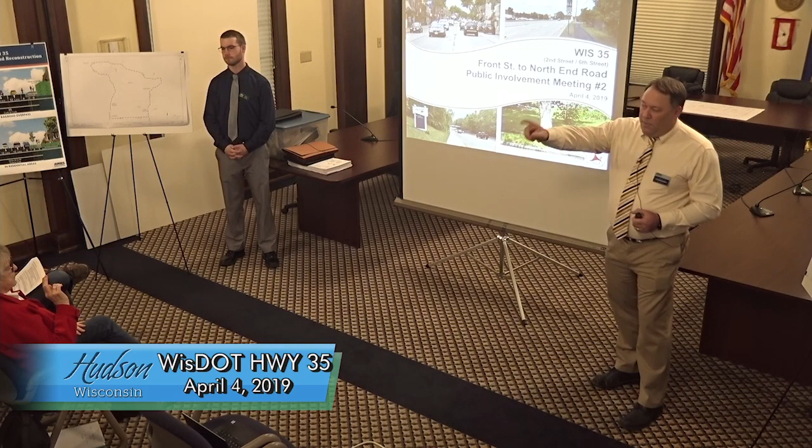So again, thank you. Please, if you have not signed in, sign in on the sign-in form in the back. That makes sure we get you on our mailing list if you didn't get a specific letter invite. We sent letters to people who own frontage or property along the roadway, or who came to the last public meeting. That's how we got you on the list. But please take a minute at the end to sign the sign-in form, and there's comment sheets back there. Feel free to take a comment sheet, sign it and put it in the comment basket on the table, or take it home and get it to us.

I think there's a date, we try to do it in the next month. I know some people are confused about when things started, but there are people who think the meeting presentation is going to start at 5:30.

Well, trying to accommodate. People back here complaining they're not starting until 5, and now we're complaining it's not starting until 5:30. I'm not complaining, I'm just pointing out. Right, what's on the web. Well, just saying something that might. Yeah, I know.

Well, I apologize for the confusion. I should have bolded that or made it a little more clear in the letter. I'll get started, I'll keep going regardless, and if some people come in, I'll make sure I talk to them one-on-one afterwards. Again, I do want to thank you for taking the time to come and talk about this project.

It's a pretty big project for the city and for the state. We've got a little presentation we're going to go through, and then exhibits around the room you're free to come up to. We're here till 9 o'clock tonight. We're doing this presentation twice, so there's a meeting from 5 to 7, and then one from 7 to 9. The 5 to 7 was meant for people who lived in Hudson, and the North Hudson people to the next one, but it doesn't matter.

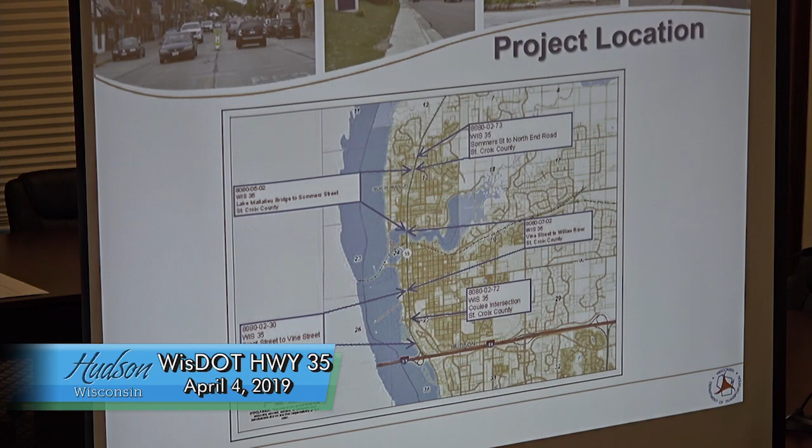Within that project, there's going to be an improvement project at the Coulee/Buckeye intersection. That's a different one of these IDs, the second one. Then we've got the next map, which is Vine up to the bridge.

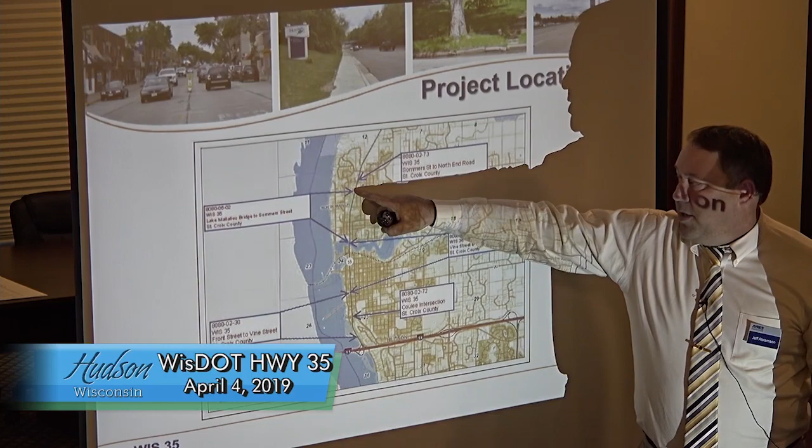That's one project, and the bridge up to Sommers is the last project. If you were here at the first meeting, what's happened since then is we've added this. Before, this project was going to end at Sommers, but now it's actually going up to North End Road, about 850 feet. There's some work being done on that stretch, and some safety improvement dollars got allocated for that, so it's its own project.

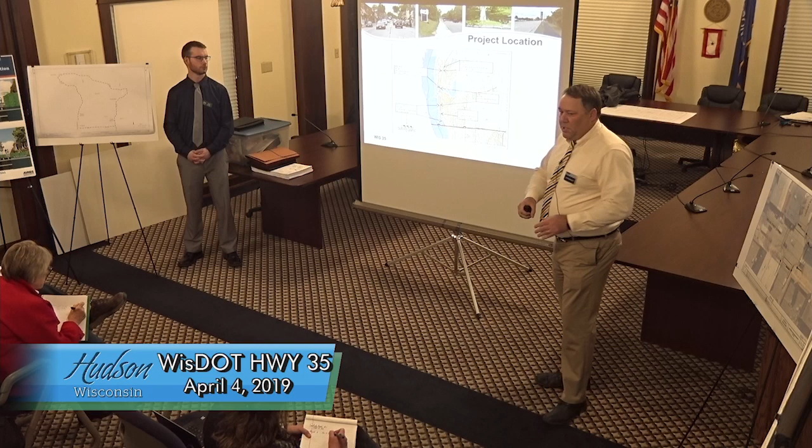So there's a lot of numbers and a lot of titles and names. There's really 5 projects, but it's broken into 3 main projects and then 2 little safety projects scattered in there.

So, need for the project. Obviously the pavement's in rough condition out here. We've got issues with stormwater, aged utilities, basically stormwater and sanitary. Safety, curb ramps - we're trying to upgrade curb ramps to meet ADA standards.

As I mentioned, the Coulee and Buckeye intersections had some crash history, some safety issues we're trying to address there. Substandard vertical clearance at the railroad - we gotta get to 14.5 feet, which is what we want. Right now it's 13.10 roughly.

So we gotta lower it a little bit under there for minimum standards. And then up between Sommers and North End, there's been a lot of rear-ends. There's a lot of people turning into the gas station, the restaurants, those type of things. So there's work that's going to be done there, and I'll explain that when we get into the specifics on the project.

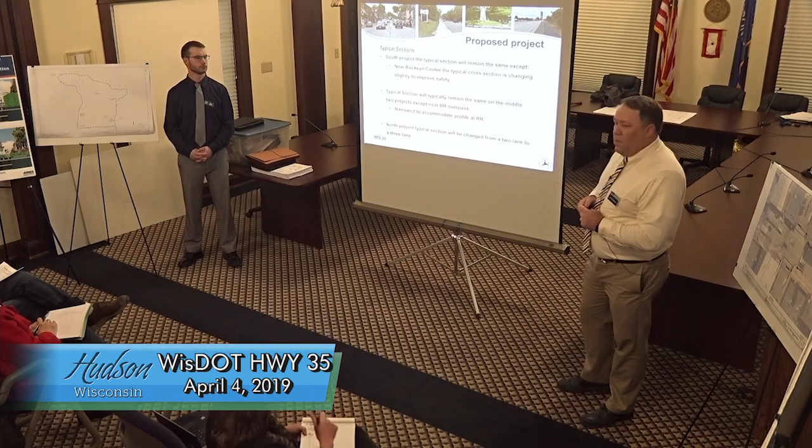So the proposed project, what we're really proposing out here, the South project. Are you guys going to be taking out some trees along the pavement area? Yes, a lot of trees. At the last PIM, we mentioned that too.

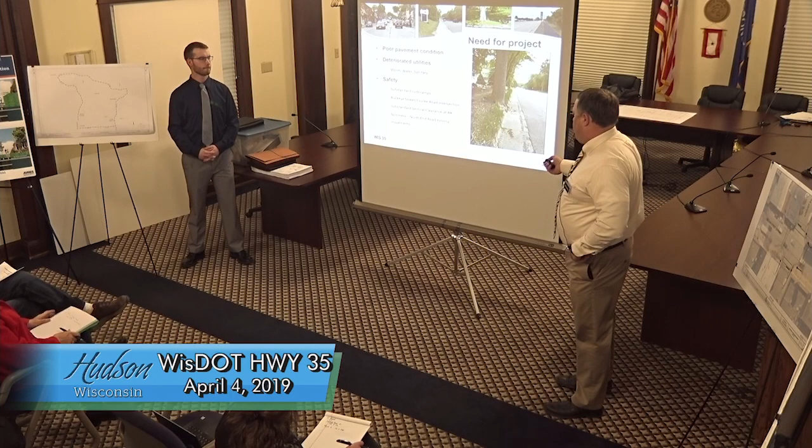You can see this tree is actually grown over the curb and gutter. A lot of it's humping up the sidewalk behind it too. Maybe I'll get into that as I go through what's happening on each project.

I'm going to start on the South project, the typical section on the South project. The typical section means kind of what the road looks like. So this South project, we are not planning on replacing the curb and gutter or the sidewalk that's out there.

South project, from the beginning of the project at Front Street up to the Coulee intersection, is a joint repair. That's concrete pavement right now, so we're going to go in and fix the bad joints. Then there's some safety work at Coulee - I'll touch on that in the next slide.

And then from Coulee to Vine through the downtown, that's a coarse mill is what we call it. We're going to mill and then overlay, so that'll get a new driving surface, but it's not going to get all tore up. The sidewalk and curb and gutter are going to remain.

So that first project, sidewalk and curb and gutter are in place, except for curb ramps, where we're going to improve them to meet current standards. Question: I thought you said you weren't going to do the curb, and now you just said you are. No, did I say it wrong? You had originally said Vine to Coulee, and you meant Front Street to Coulee. I apologize.

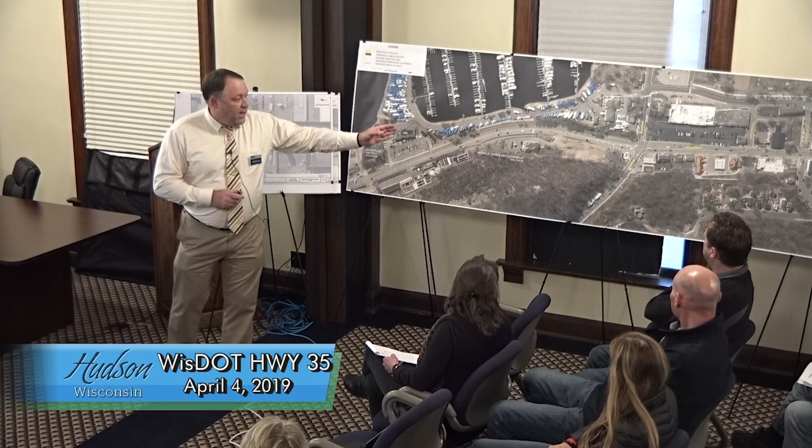Front, there's a lot of names here. Front to Coulee, curb and gutter, sidewalk is in place, joint repair - that's it. Coulee, Buckeye to Vine, sidewalk and curb and gutter is in place - that's a mill and overlay.

Everywhere there's a curb ramp, we're going to improve it to current curb ramp standards. So that does require some sidewalk and a little curb and gutter at each of those locations. That's kind of the exception.

When you say improve, what do you mean by it? Because there are already some ramping there. Yeah, but to be ADA accessible, there's certain grades - it can't be more than roughly 8%. And you gotta have these truncated domes, the bright yellow ones you can feel.

I don't know what you call them - I guess a truncated dome warning field is what we call them on curb ramps. So those are getting put in, and then there's certain widths and slopes that curb ramps need to be to make it handicap accessible, I guess is what it comes down to.

Did you want questions during, or do you want to wait? Yeah, it doesn't matter, I want to keep this pretty informal. I thought I saw in previous plans, plans for improved parking for pedestrian safety, that we'd have bump outs at the intersections downtown. You caught me - I was going to get to that, yes, you're right.

That is one of the things I was going to bring up that's different from the last time we met. That's what these displays here are. At a few of the intersections, we are putting what we call bump outs in the downtown. That's something new that the city of Hudson decided to do.

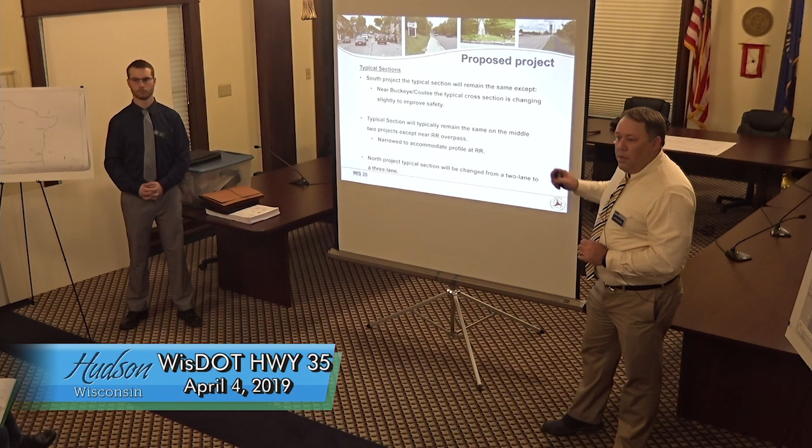South project typical section remaining the same. You're doing an overlay also, aren't you? No, joint repair from Front Street to Coulee. Those are concrete joints—they get cut out and patched and fixed. So no overlay there. The overlay is from Coulee, the Dairy Queen, up to Vine.

The next two projects, basically from Vine to the bridge, that's still within Hudson, and then the bridge up to the Sommers, which is in North Hudson. Those two projects are classified as reconstruct projects—they're getting a whole new pavement structure. So those are getting torn up, with new curb and gutter along the whole length of those projects.

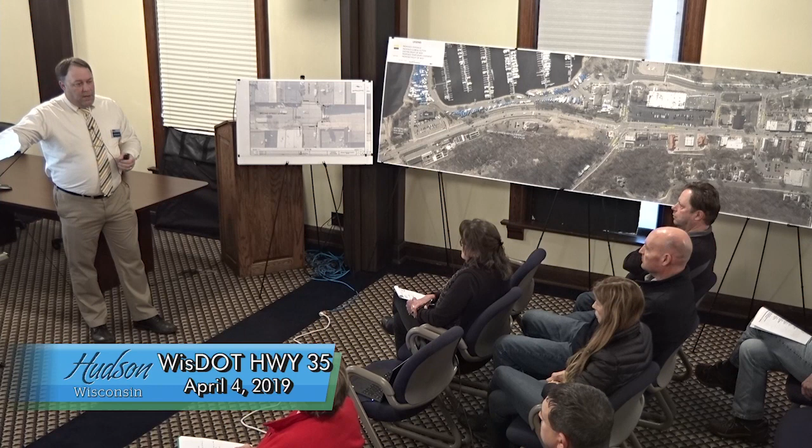Sidewalk's going to remain, except for curb ramps that we're going to upgrade. There's also some driveways we're trying to improve the grade on—some driveways are kind of steep, you bottom out. So we'll be replacing some panels at curb ramps and some sidewalk. There's also utility work going on out here, water and sanitary work, that's going to require laterals to people's homes. Those laterals will go up to the right-of-way line, but that requires a panel or two of sidewalk to be replaced.

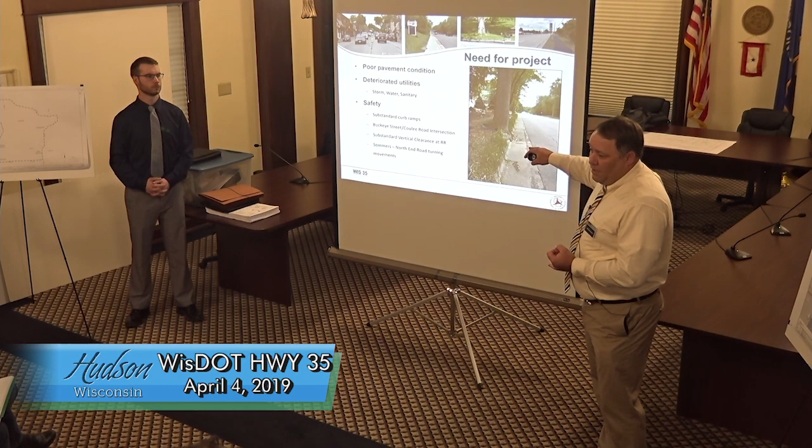From that stretch from Vine Street to Malibu, are you taking out all the trees, or just selectively taking a couple out? No, it's the majority. The problem is we need a couple feet behind the curb in order to pour new curb and gutter with the machine that pours it. They're beautiful, old trees, but in order to fix the curb and the utilities, a lot of those are coming out.

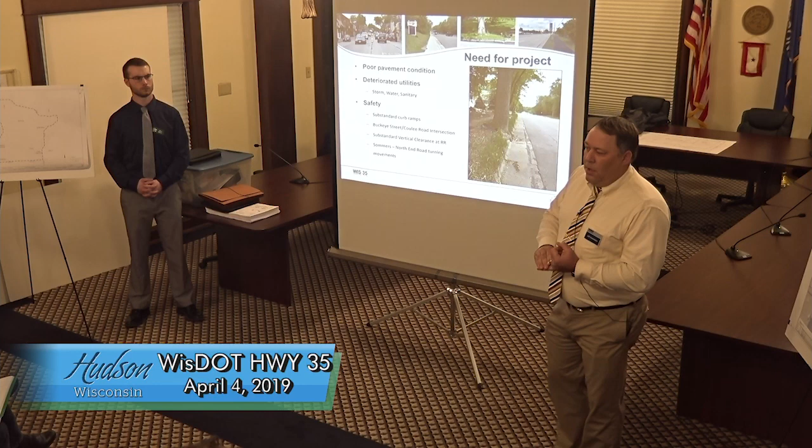We are planning on—correct me if I'm wrong—replacing or putting some new trees in at the end. I don't know the extent of that yet, we haven't gotten that far, but there were some plantings that were going to happen as part of this.

So the typical section, meaning the roadway width on those northerly reconstruct projects—we are going to tear up the pavement and put new base down and new pavement. The plan is that will be a concrete pavement. Right now it's asphalt with some underlying concrete in areas, so that will be a change. But the pavement design shows that with the traffic volumes out here, concrete is the most feasible.

Are you going to deal with all the sidewalks that don't line up and ramps, or pedestrian paths that don't go anyplace? No. The sidewalks, in general, are going to remain in place except for curb ramps and where we need it for utilities and driveways.

The city of Hudson has asked us, when we bid this project out, to bid it as an alternate bid, as they call it. Our plans will show just removing those pieces of sidewalk that have to be replaced, and it ends up being almost half the sidewalk, when you start looking at curb ramps, all the stuff for water and sanitary, some driveways, and stuff that's busted because of trees.

Well, if I understand this, you're saying from Vine Street to the bridge, you will have on-street parallel parking? No. You mentioned parallel parking. Yep. So from Vine Street, currently, today, from Vine Street to the bridge, parallel parking, it's 40 feet wide, which accommodates parallel parking. What we're proposing is to change it. It'll go from Vine to River, which is two blocks short of the bridge, it will be the same as it is today. And then from River to the bridge, we're going to pull it in two feet on each side, which then eliminates parallel parking, but allows us to have bicyclists on-street to get across the bridge.

I've got a slide on bike and pedestrian coming up, I can talk about that a little more. And we really need that. What the driving factor is, we're lowering underneath that railroad overpass, lowering the road about a foot at worst case, zero inches down to a foot. And to lower that, if we move it in two feet on each side and lower it, we can get rid of that vertical between the back of curb and the sidewalk, because right now the sidewalk is butted up tight to the back of curb. If we pull it away two feet, then we'll have room to put a slope in there.

So the sidewalks will remain, those retaining walls will remain, and one of the big reasons is the bike accommodations. There's on-street bike that's going to be in the middle, going through downtown with parking, you can't have bikes, there's no room for bike accommodations. So the plan is to take bikes down Buckeye, have on-street bike accommodations on Buckeye, and then all the way past the park or all the way on First Street. And then River is the last one that comes back out. So bicyclists will be accommodated on street from Buckeye all the way up to River. And when they come back onto 35 at River, the typical section of 35 will handle bike accommodations all the way to the north. It's either to accommodate bikes through your downtown, you either got to give up your parking on one side, because there's not enough width there with everything that's there. There's not enough width to have parallel parking and bike, safely have bike accommodations. So that's a driving factor.

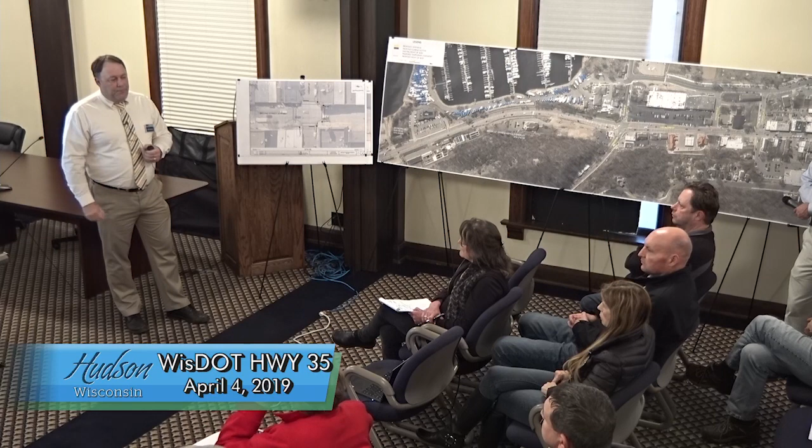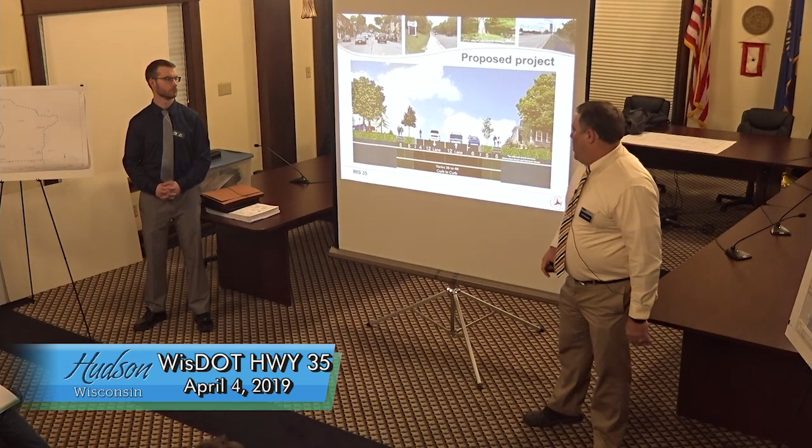So that's a change from what you see today. These are just depictions, and we can look at these one-on-one, but typically we've either got a 36 or a 40 foot. In the 40-foot version, you've got 6 foot of extra width plus your 2-foot gutter.

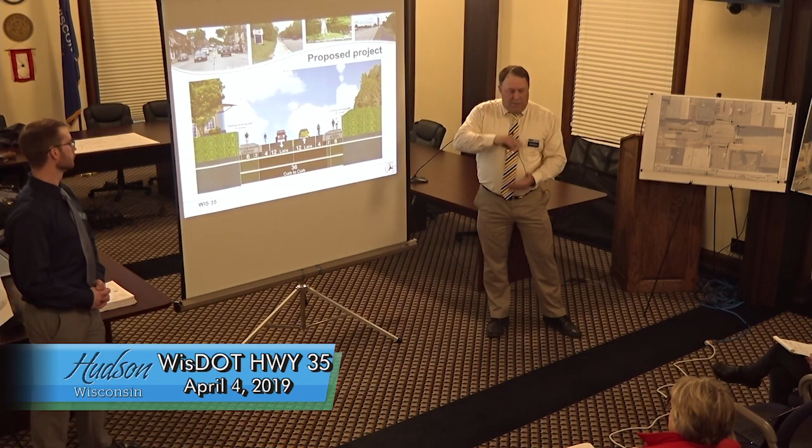It gives you an 8 foot for parking, and then your existing sidewalks. When it's 36, when we go underneath the railroad overpass, picture the railroad overpass up above here, it'll be a 12-foot lane, a 4-foot that will accommodate bikes, your curb and gutter, and then a slope up to the existing sidewalk. That's where we can get rid of that vertical change that we have to do to get our clearance under the railroad.

Again, this is just a summary of what I kind of jumped ahead to because we're kind of all over the place, but the summary of what's happening on the rehabilitation: joint repair for the south half of the first project, and then a mill and overlay, doing safety improvements at Buckeye, and doing curb ramps.

On the south project, can you explain what you're talking about in terms of safety improvements at Buckeye? Yep, I will. How about another slide or two? I've got a slide specifically for that.

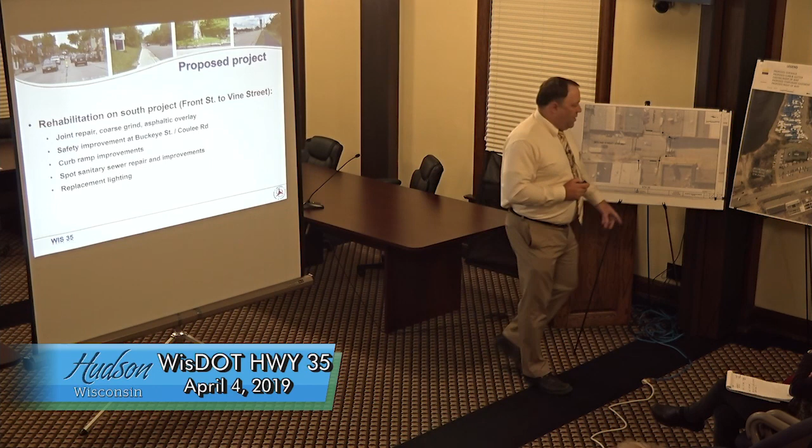One thing I probably haven't mentioned yet, on the south project down by your wastewater treatment plant, the city is going to be doing some repair or replacement of some sanitary main trunk line down there. So there is a portion, I believe it's in the northbound lanes. This is actually 4 lanes down here, but the rightmost lane is going to be a trench, replacing some new sanitary lines down there.

And then, like I mentioned, water and sanitary work north of Vine the whole way. But down on this end, there will be some sanitary work. That'll require us to flop some traffic back and forth for staging, and I'll get into the staging here in a second.

I realize it's probably hard to see, but really what's happening at Coulee and Buckeye, there's some safety concerns here. There's a northbound right turn lane in front of the Dairy Queen. That right turn lane is going to get extended back, so we're going to add some storage and length to that right turn lane. And right now at that intersection...

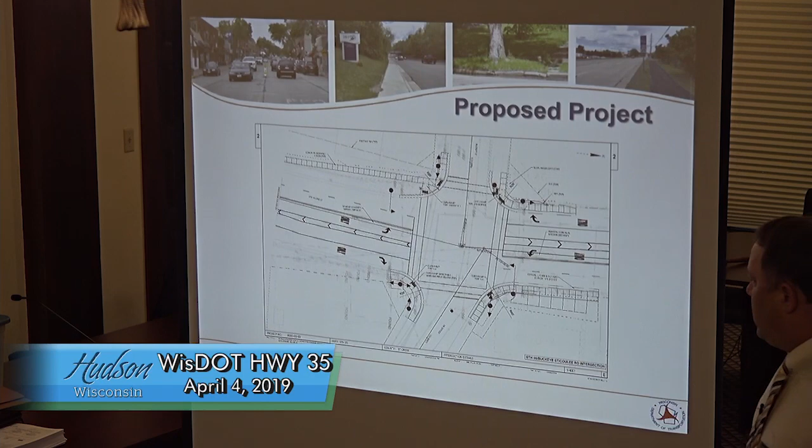It's hard to see here, but there's some existing channelizing islands out in the middle of this. Those 2 islands are getting removed, and what that does, it allows us to line up the southbound left turn and northbound left turn more straight across from each other. Right now they're offset because of those islands. So when we remove those islands, we can line them up, and it's a lot safer when you're making a left and the other person making a left is straight in front of you. If you're offset, it's a bigger safety concern. So that's the main safety improvement there, realigning those left turns so they're opposing.

And then, like I said, adding some length to that right turn lane. Will there still be just one northbound lane then at the Dairy Queen? Correct. Yep. The lane configuration will be a right turn lane, a through lane, and a left turn lane, same as there is today. It's just by removing those median islands out in the middle there, we can line things up better and make it a safer functioning intersection.

Is there any thought of putting some signage further down the road towards the sewage plant that identifies left, center, and right turns? Because what happens is people coming down that left-hand lane where it's 2 lanes, they're barreling down there, there's a backup of cars to go straight ahead, and all of a sudden they find themselves in a left-hand turn lane, and then they're all cutting in. Honestly, sometimes I don't think people realize that they're in that left lane and it's going to be a left-hand turn lane.

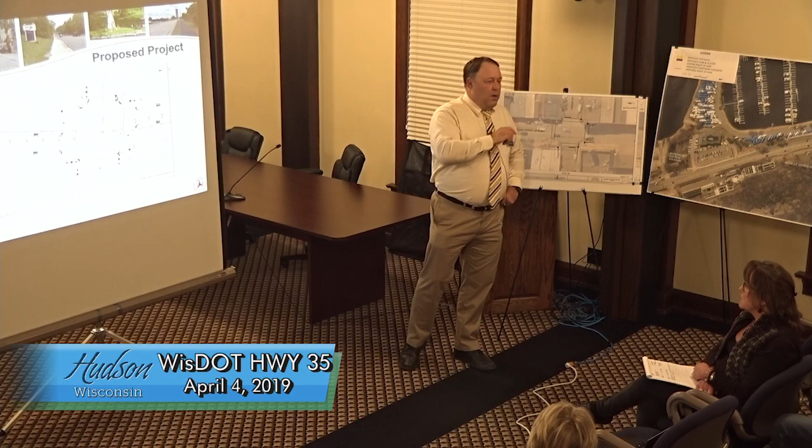I was just going to say you cleared it up, because when you redo that and those streets are lined up together, people are going to know where they can go and go straight ahead. Whereas now, if you're coming new into town, it's very confusing. It's going to make things a lot cleaner when those lefts are lined up and the through lanes are lined up. Everything will be straight.

But I know what you're saying, because you're coming from a 2 lane, and all of a sudden you could get trapped in that middle lane, trapped in a left turn lane. Or they go straight in the right turn lane. Yeah, that too. We got somebody back here that's got the mic.

I don't know if you are also in charge of the signal lights, but there is no left turn arrow as you're heading north. No left turn arrow? No left turn arrow. What they do is one side gets green and straight and left go.

As part of this project, and that's one thing I haven't mentioned yet, we are replacing the traffic signals at Coulee and Monroe. Those two streets are getting new and upgraded signals. We haven't gotten through doing the signal timing and the phasing yet on them. Sometimes what you're saying happens because those offsets are, those lefts are offset. It's hard to get them to go at the same time. When they're lined up, you can get them to go at the same time easier.

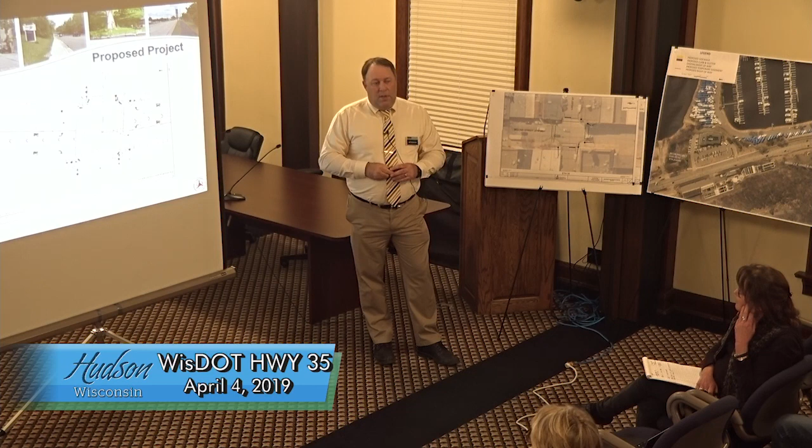So it might fix itself. I don't know what the timing is going to be on those yet, or the configuration, but I'll make a note of that. Yeah, there's no left turn signal, northbound left arrow, when you're going north, down by the Dairy Queen. Okay, somebody up here.

On the map over here, it looked like you're revising the sidewalk on the southwest corner of Buckeye. Right here? Oh, southwest, I'm sorry. That's a really, really, really bad corner for bicycles. It's impossible for bicycles, and that is a bike traffic lane. So two things: one, it kind of looks like you're cutting it a little bit, so it isn't going to be a 90. Right now, you are correct.

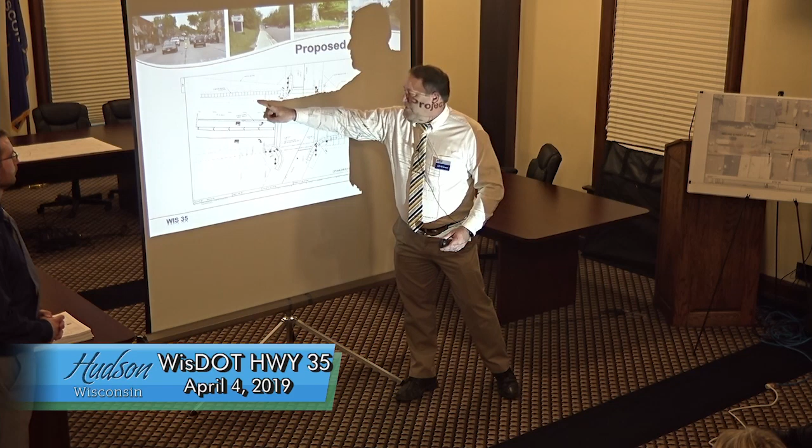I didn't mention that there's about 200 feet from here back where the sidewalk does have a boulevard. Once you get past the marina, there's a green space between the curb and gutter and sidewalk. Once you get up here, that sidewalk dives in and falls right up behind the curb around here. We are going to pull that away for that couple hundred feet to line that up, or to give a boulevard and improve the safety there.

And what's that? Widen? Are you gonna make the sidewalk wider there? Maybe. That's a heavily traveled bicycle path right now. Maybe, yeah.

Wait, if you did that, because it's a dream that the rest of that sidewalk all the way to the bridge gets widened. We're looking at some options with the city to maybe make that a wider 8-foot path. I don't want to commit to that right now because I don't know if it's going to happen yet or not. At a minimum, we're going to pull the sidewalk away so it's not right up tight to the back curb. But there's an option where we may, instead of having that 5-foot sidewalk, make it an 8-foot wide paved path.

Is the signal light construction one of the issues? Yeah, the pole right there, yeah. And that's why we want to get that sidewalk away from that intersection. There's too much stuff in that corner too. But there is an option that we're talking with the city on of making that a wider paved path that could then accommodate bicyclists and peds better.

I'm more or less, I don't really have a question about the project itself. I know you said that on that intersection, at one time you guys had looked at putting a roundabout there, but the cost-wise and the space-wise, it didn't work. And I was talking to a coworker of mine about this. The roundabouts that I've seen, I lived in England for 4 years, so I'm familiar with the roundabouts.

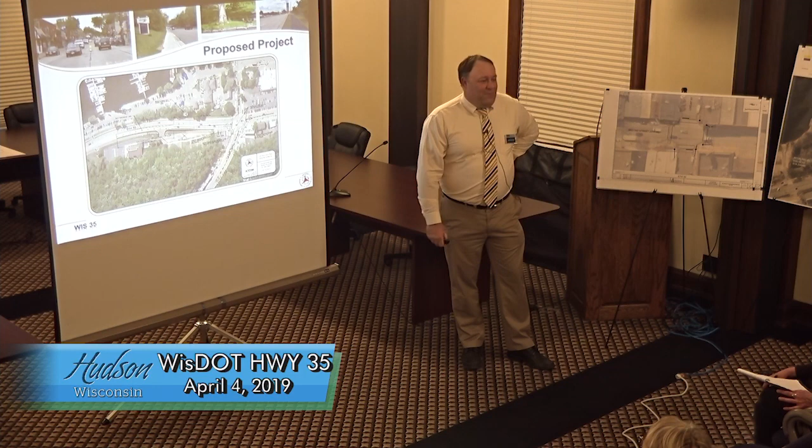I know what you're talking about on that sign, and if you look, there's usually a dot on that sign with the left arrow. It means you're supposed to go around the roundabout. Who's going to look at that sign and know that? Everybody knows you have to turn right, but you've got an arrow going left. It's crazy, two arrows going right would be better. It's an educational process, I know. Probably somebody decided that it's gonna be that way, and anyway, we're not proposing a roundabout here.

Summary of the next projects we talked about: new utilities means storm sewer, water, and sanitary from Vine all the way to the north. That means new curb and gutter, and that means existing sidewalk stays, same scenario, except for curb ramps, some driveways, and except where water and sanitary impact it.

I talked about the change in width from the river up to the bridge, narrowing it up 2 feet. I also talked about tree removal. There's going to be a lot of tree removal required out here. It's required, I mean, we can't do a project like this without it.

I get that, I'm gonna talk loud. But when you remove these trees, can you do something with that wonderful wood besides grinding it up into mulch? Aren't there forestry people or something that can use that wood? I don't know the answer to that. I mean, normally when we have a project, the contractor is responsible to get rid of the wood. I don't know what they necessarily do with it.

I don't know, have you guys ever done anything else at the DOT with it? Up in Ashland, I know we did Ellis, and the contractor sold it to an artist who did chainsaw carvings and that kind of stuff with them. It's probably up to the contractor. I mean, if it's good wood, they're not gonna waste it, obviously. So hopefully, but again, it's not something we usually direct them on what to do with it.

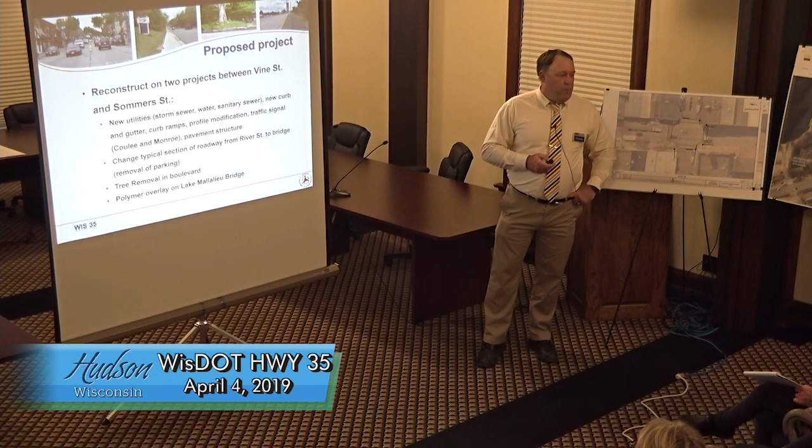We talked about the final project, which is the project from Sommers to North End. The roadway will be widened to the east, going from a 2-lane to a 3-lane. When we do that, we are planning on putting curb and gutter on the right side, or east side. It'll stay a rural section on one side, but it'll have curb and gutter on the right.

Will it have a sidewalk? No sidewalk. Just what we're calling an urban typical section, which is the curb and gutter. That road will be milled and overlaid. The widening will be new construction, but the existing lanes will get milled up, and then we'll pave it all together so we can stripe it and it'll look right, designating which lanes are for what.

Yes? I'll talk loud again.

Is there any chance that funding may change before this all starts, and you might be able to address some sidewalks? Funding is, I would say there's always a chance it could go up, it could go down, it could be eliminated. It's kind of always, you know, funded right now. So once it's funded, it's funded. I don't know if they very rarely make changes to that funding, unless somehow the state of Wisconsin won the Powerball maybe. But I would guess it's probably set where it's at.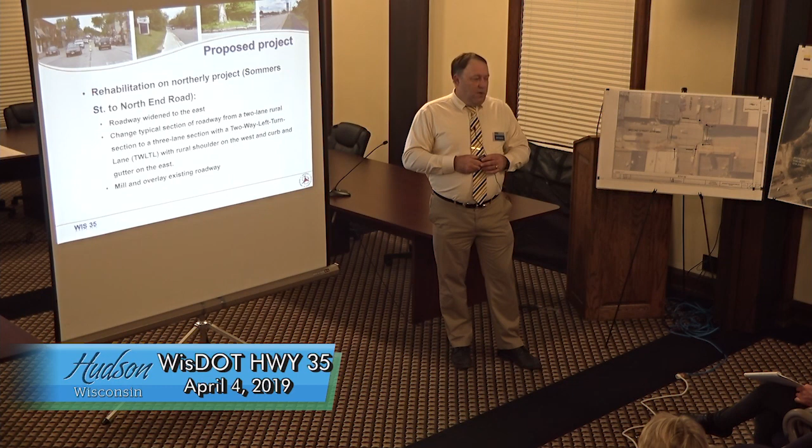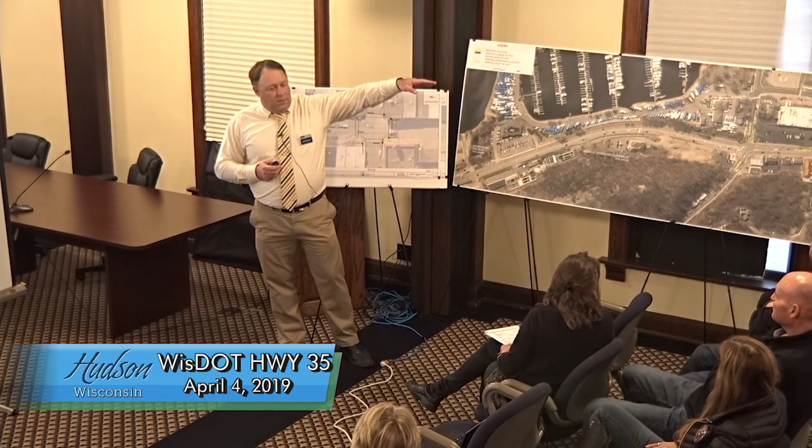So bike and pedestrian, we've kind of touched on this, but from the south, from the interstate, bike and pedestrian are on the path past the marina. Once they get to Buckeye, it'll be on-street bike up first by the park, on-street at River to get you back out to 35, and then on-street underneath the railroad overpass all the way to North Hudson.

How are you going to designate that? Is it going to be signed, or how are you going to say this is a bike route? I don't know, I assume it will be signed. I haven't talked with the city specifically about that yet, but typically I don't think there's any signing out there today that I know of.

Because although Second Street isn't ideal, that route's not particularly ideal either. There's a lot of traffic, a lot of business, restaurants. It really comes down to room - obviously you'd have to give up parking in order to get bicyclists through the downtown area, and we don't want to do that. So we'll have to look at signing. I would suspect we'll do some type of a placard or signing for it, typical bike route sign.

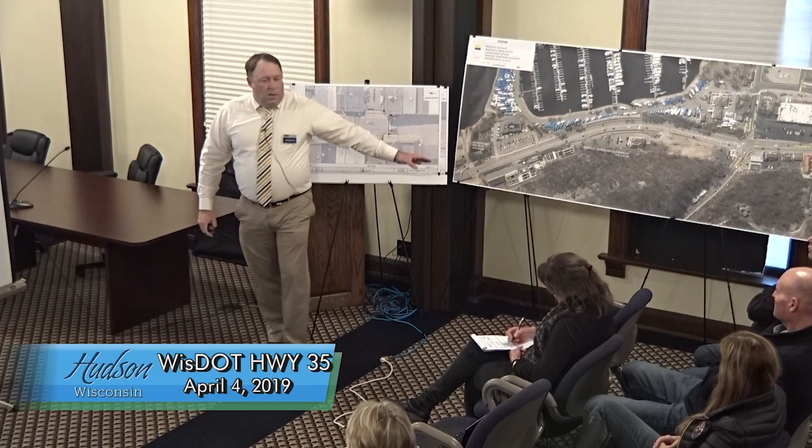To get traffic through, do you have some idea of improving those curbs at the corners? Curb ramps. Curb ramps, yeah. I don't think that's necessarily going to be a big disruption. No, it shouldn't be. But once that gets done, I assume that all happens before you do the paving. Yes, because we'll pave up to the curb then.

What are you thinking is going to be a typical time to get the paving done from the Dairy Queen up to Vine? Dairy Queen to Vine is just a mill and overlay basically, a coarse grind mill and overlay. That's probably, what is that, 1, 2, 3, 4, maybe 4 or 5 blocks. 5 blocks. You're probably looking at - I want to make sure I don't overcommit, but you're probably talking a month.

Because you got pedestrian, the curb work - or are you saying without the curb? They'll mill that in probably a day or 2 days, they'll have it all milled. Yeah, that part will go quick. And the paving will only take a few days, but you gotta remember there's a couple bump outs that are being put in there too. I haven't even mentioned this yet, but there's also some lighting work. City's going to be replacing - there's some existing street lighting there, and we're looking at replacing some of that lighting, so there's some electrical or lighting work that'll happen.

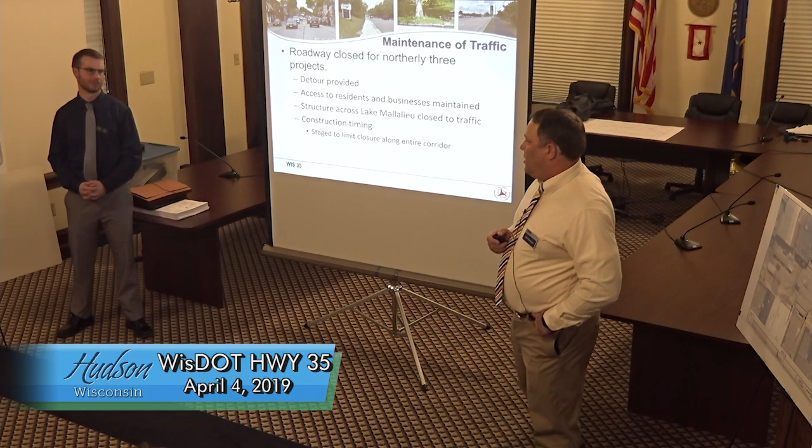What's the time frame? Do you know how long that detour will take, and how long will it be closed? I don't know the timing on the detour, I have not driven it, but I know it's a ways. I don't know if Brad knows how many miles it is. Explain again where the detour goes.

Down the line, so Vine is also Highway UU. Highway 12 coming up, and then Highway A. So Highway A to the north, and then Highway E going west. So A to E, and then the 35 back down.

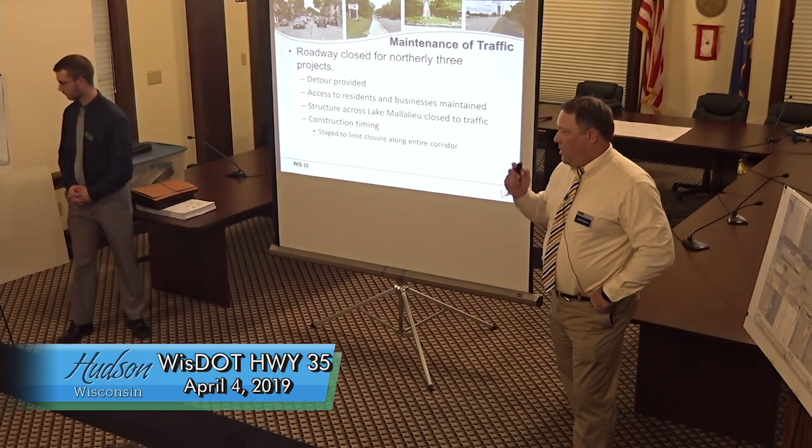Jeff, you'll have those details at the next meeting. Yep, as far as we can figure out the timing and the exact mileage. That's really the only detour road — this is a state system, we can't force the traffic onto city streets and town roads. So these are county highways, and that'll be the official signed detour route.

Will there be any signage coming from Minnesota so they could go up and across the new bridge? We typically won't sign in Minnesota, but once you're on 35 we could — we'll sign for southbound people before you get to E. As you're heading south on 35, before you get to E, we'll have it signed to say detour route, you gotta take E to get around. So it'll be signed from there — we won't actually go into Minnesota and sign it, but 35 itself will be signed for people heading south or north.

Why does the bridge have to be closed? Well, again, there is some work being done on the bridge, it's not a lot — there's that polymer overlay. But the bigger concern, I'll be honest with you, is safety.

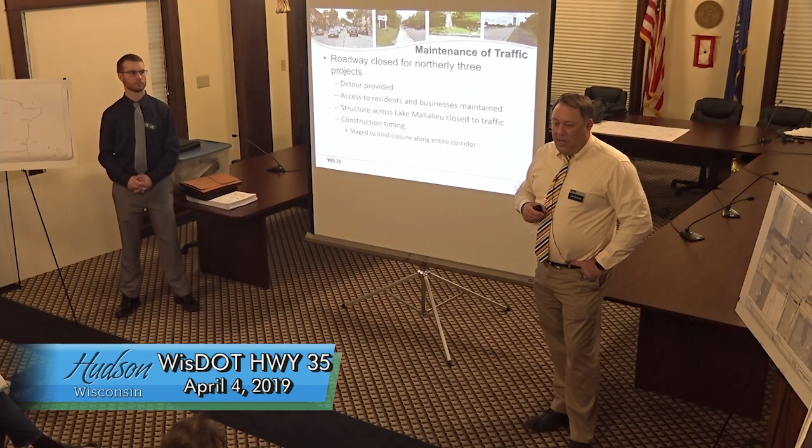It's because we don't want traffic going through the work zone. We are going to have 15 to 18 foot deep holes where this sanitary is going in, and when you dig that deep, it's not straight up and down, it's wider. We just don't want, for public traveling safety, people driving through this — it's not a good situation. So it is going to be closed, it'll be barricaded off. If emergency vehicles have to get across, they'll be able to move the barricades. But we want to go with the signed detour route to get people out of that area.

We want to get — this is going to be the majority of the summer. There's that water, sanitary, and storm work that takes a while, there's a lot of stuff going on here. I haven't done an exact breakdown by the weeks yet, but it's going to be a full construction season with all the work going on out here.

Will you be able to walk across it? I don't know, I guess we haven't talked about that. There's sidewalks on it, but I don't know — typically when it's closed it's closed to pedestrian traffic as well.

Technically the sidewalks are going to be closed - you won't be able to walk across. We're replacing sidewalk and doing the connections to the people's houses, so sidewalks will have to be closed. I would assume we'll keep the whole thing closed.

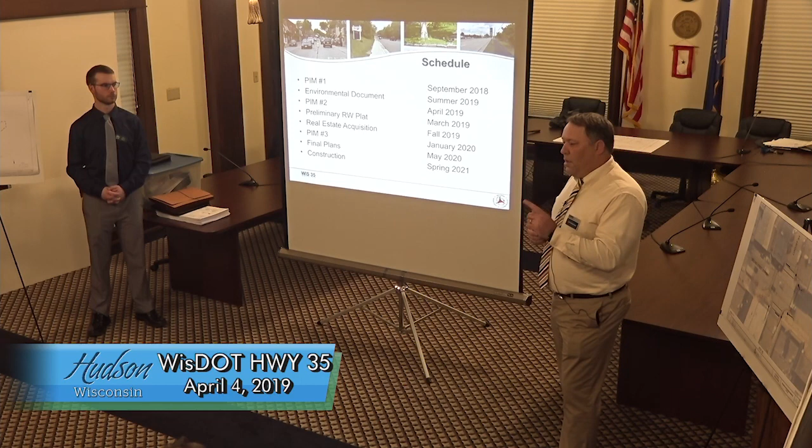Are the sections of the project going to be done in sequential order, or are they all going to be done kind of at the same time? No, that's something we haven't figured out as far as when. The intent was to always not have this whole thing torn up at once; we wanted to have it done in segments.

The south project is a lot shorter time period. The final project, from Vine to the end, is the longest duration project, so that will probably start early and end late. The project from Front to Vine will probably go sometime in the middle, while one of those other ones is going - just the way it works.

We haven't gotten into those details yet, but we've talked about it. We may try to put some restrictions on the contractor so they can only have so much torn up at a time. Some of it's hard to do because of connections of water, sanitary, and storm, and how that all works. We have to keep those facilities open to people too. But we don't want the contractor tearing up two miles of this all at once, if we can help it.

I have one question. So you're not going to do things in order from south to north, you're going to do it here and there? And what do you estimate the project to go from 2021 till when, how long of a period? It's one summer, 2021, start and finish in summer of '21. Thank you very much.

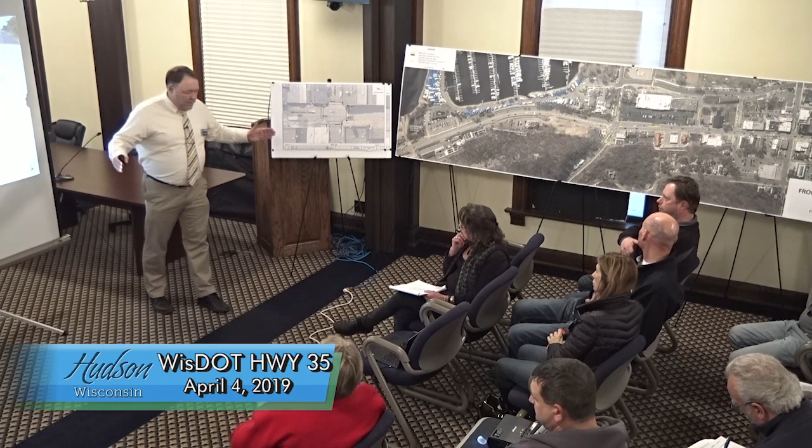At St. Croix we are putting what we're calling a pedestrian refuge, like an island, a safety zone in the middle. That's a pretty big pedestrian crossing there, almost like a school crossing, but there'll be an island out in the middle, a long parallel skinny island that'll basically cut the distance in half so people can walk across half and then walk across the other half. That's something I forgot to mention, I apologize, but that's happening at St. Croix.

Is the state paying for this, or will people along there get assessed for curbs and gutters and all that? Some of both. The state's paying for the main project on Highway 35.

The city is doing their water and sanitary. I don't want to speak for the city, I don't know how the city assesses, but some of the costs are going to the city because of the water and sanitary, the lighting stuff they're doing, and some of the supplemental work that goes with that, fixing some of the curb and some of the pavement. I don't know if somebody from the city wants to answer that, I don't know how you guys handle that.

Water and sanitary will not be assessed. The utility picks up that cost. If it's sidewalk repair because of a lateral going to your property, we will also pick that up. So on the utility side, there's no cost. Okay, so it's good to know.

So the curbs and gutters are covered too then, right? By the state, that's part of the DOT project. The only assessment would be if the city decides to replace that sidewalk, all of it, from Vine Street to Lake Mallalieu, outside of the utility and the state, which is about 50% of the sidewalk replacement. If the city does go ahead and replace the remaining portion of that sidewalk, that would be assessed at 50%.

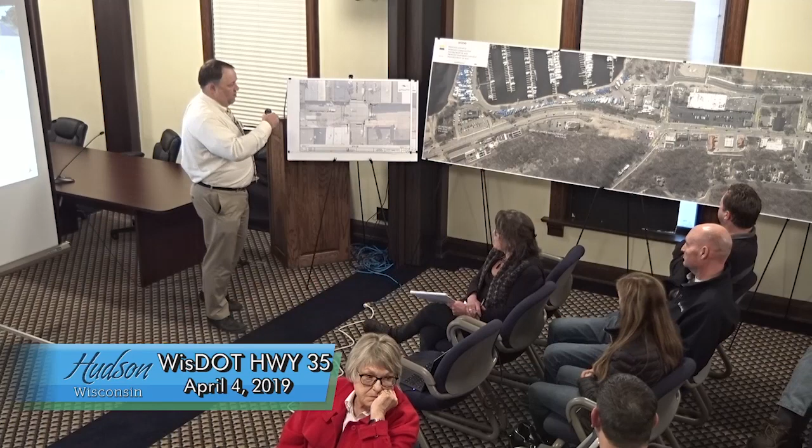That portion of the project is going to be dependent upon the pricing we get back, the funding we have available that fiscal year, that type of thing. So that may or may not happen at this point. But the city does have that option where I mentioned we were going to do an alternate bid on that. So it may get replaced, it may not, half of it.

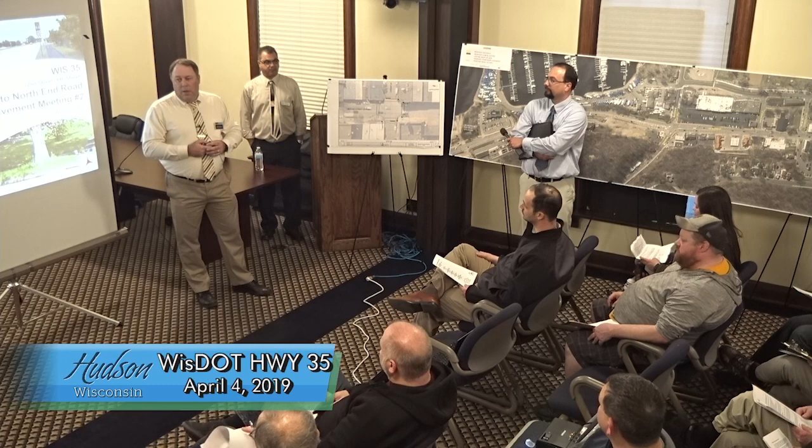We've got some exhibits around the room. The big long exhibits start at the south end of the project - Front Street is down here with the interstate, then front by the wastewater treatment plant, and it goes north as you go around the room, all the way up to the bridge and then into North Hudson to the North End Road. We've got some displays of typical section, of a detour route, and some other things. We'll go through the presentation.

Feel free to ask questions - last time people asked questions. We want to keep it pretty informal. Ask questions whenever - if you have a question, raise your hand, we'll address it. At the end we'll have time to go one-on-one if people want to look specifically at their property or where they're at. We'll have time afterwards. So with that, we'll get started.

I already did introductions, I should have had that up when I talked. State Trunk Highway 35, project overview. We're going to talk about the need for the project, the proposed project, how we're going to maintain traffic, what the schedule is, and then open it up for questions.

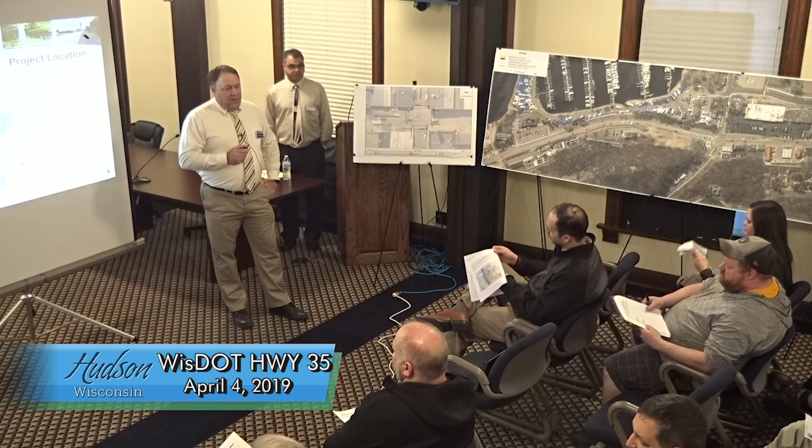There's a copy of this in the handout. I know it's hard to read up here, but basically there are 5 projects we're talking about today. It gets a little confusing because there's different funding sources and different things going on, but there's 5 projects. The first project is what we're calling the Southerly Project - this is this big long map. It starts at Front Street and goes up to Vine, so it goes through the downtown business district in Hudson. Within that project, there's some safety funds allocated for doing some work at the Dairy Queen intersection of Coulee and Buckeye.

Second project goes from Vine Street up to the bridge.

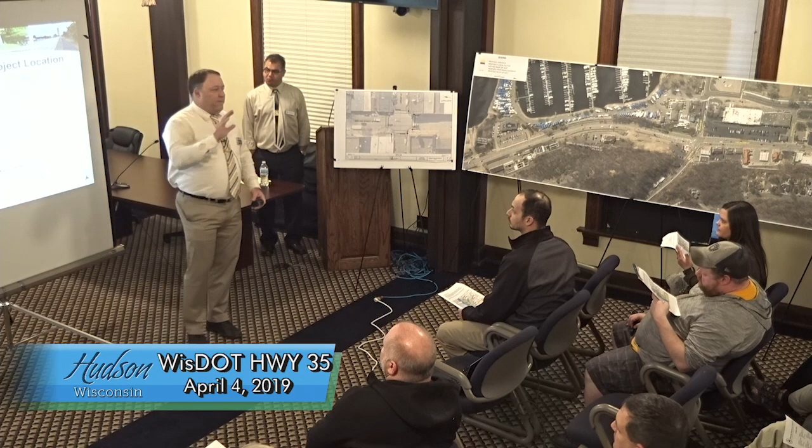If you were here at the first public meeting about a year ago, that piece was not part of the project. It has gotten added on. The department has gotten some safety funds to address some issues up there, so that piece is added on. That's new, but we'll talk about that as we go through.

Need for the project: the pavement is in pretty poor condition through the majority of the corridor. You've got some aged utilities, quite old, water and sanitary. Storm sewer is old, and there's some storm sewer that's not adequately sized. Safety throughout the whole project corridor - curb ramps we want updated to current standards.

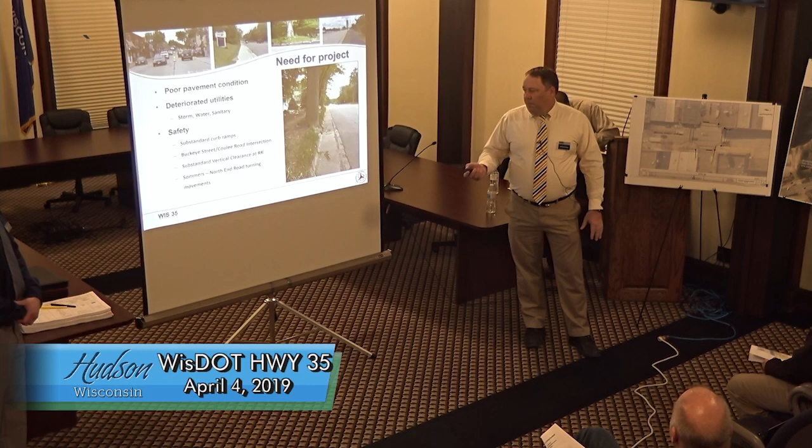As I mentioned, we have some safety funds at the intersection of Coulee and Buckeye, I'll get into that in a bit. We have substandard vertical clearance under the railroad, just south of the bridge, so we're going to be doing some work on the road there.

And again, between Sommers and North End, there's been a lot of rear end crashes there, people turning into those businesses and the gas station. So we're going to do something up there to try to address some of those issues.

So the proposed project - I'll start by talking about the South Project, which is from Front to Vine. When I say typical section, I mean the makeup of the road. The typical section is a 12-foot lane, a 4-foot shoulder, 2-foot gutter pan, curb and gutter, and then sidewalk. On that project, the typical section is going to remain the same.

We're not widening the project out. On that South Project, the only thing that's really changing is at the intersection of Coulee and Buckeye. There is some work being done there that's going to impact the curb line. But in general, the curb lines are going to be the same, and I'll get into what we're actually doing on each project in a second.

On the North projects, from Vine to the river and the river to North End in the Village of North Hudson, that typical section will remain the same almost everywhere. There is one exception under the railroad overpass - right now it's wider, and we're going to narrow it up a bit to be able to provide some on-street bike accommodations through there. So I'll touch on that in a minute. There is a profile change under the railroad.

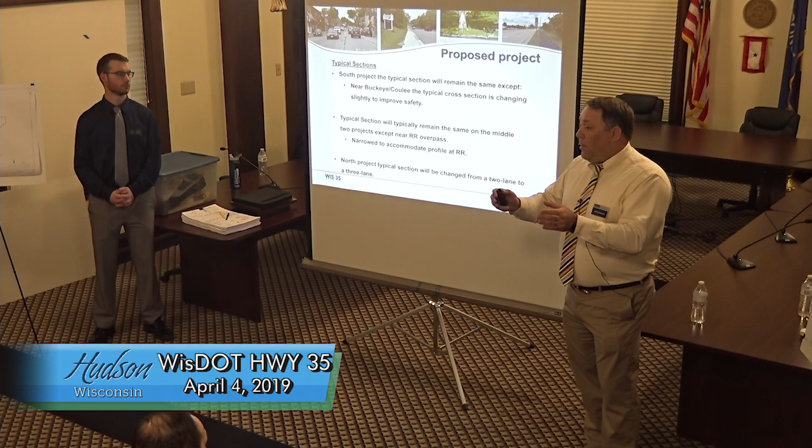And then the typical section from Sommers to North End, that's the safety project I mentioned. That's a 2-lane rural roadway now, with gravel shoulders. We're making that a 3-lane, going from 2 to 3, and I'll touch on that as we get going here.

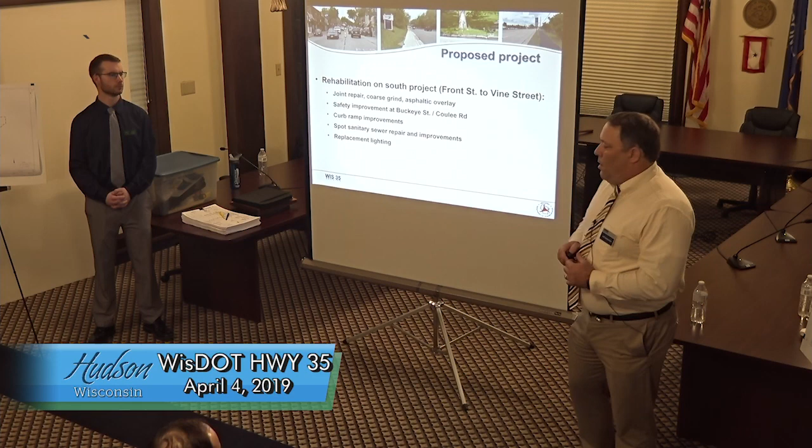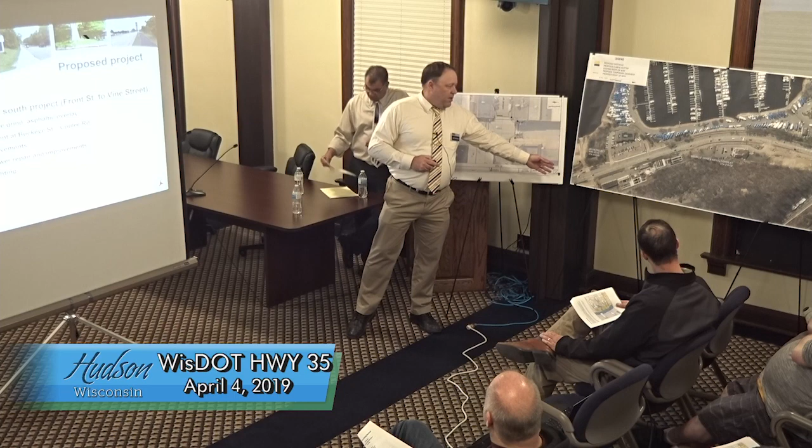So the scope of work we're looking at doing out here - the south project is a joint repair from the beginning of the project at Front Street, which is concrete pavement down there. From Front Street up to Coulee, it's going to be a joint repair, meaning we're fixing the bad joints - cutting them out, fixing them, and pouring new concrete there.

There's some work being done at the intersection, a safety improvement at Buckeye, and I'll show that in a second. And then from Buckeye up to Vine through the downtown business district, that is going to be a coarse grind and overlay - we're going to grind the surface, take a couple inches off, smoothen it out, and then it'll be overlaid.

Along that project, the curb ramps are going to be upgraded. The curb and gutter and sidewalk is going to remain in place on that southerly project, except at curb ramps. At the curb ramps, we're putting in new standards, which are flatter slope and have those domed warning fields on them, usually painted bright yellow. Those will get replaced everywhere there's a crosswalk with a curb ramp, so sidewalk will have to get replaced at those, and also the curb and gutter in front of them. But in general, on the south project, the curb and gutter and sidewalk are remaining, except for those areas we need to fix.

The city is doing some sanitary work down by their wastewater treatment plant. So the northbound lanes are going to be impacted down here by some of the sanitary work. There's a segment down south by the treatment plant that will get new pavement on it because of that utility work.

And then we're also extending that right turn lane. There's a northbound right turn lane that goes past the Dairy Queen. We're going to lengthen that back to give a little more storage there. So that's the extent of the safety work that's going on at that intersection. And then new traffic signals will be put in at that intersection as well.

On the next two projects—the city of Hudson from Vine to the bridge, and then North Hudson from the bridge up to Sommers—those are what we call reconstruct projects. So those are getting a whole new pavement structure, meaning we're tearing out the existing asphalt and underlying concrete and putting a new pavement structure in.

Along with that, that's getting new utilities put in. Utilities means water, sanitary, and storm sewer. So the city of Hudson and the village of North Hudson are putting water and sanitary in—main trunk lines and then laterals out to the property lines, not up to houses, out to the property lines, okay?

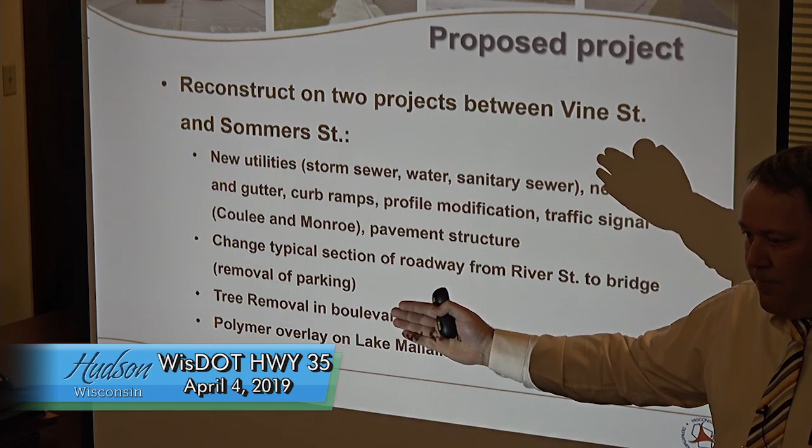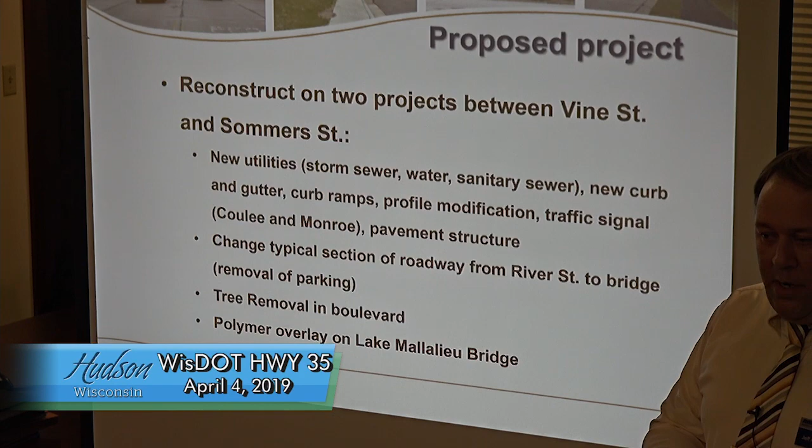With that work, there's going to be new curb and gutter installed, so all new curb and gutter. It's going to be a concrete pavement. Sidewalks are going to remain, most likely, except for the crosswalks that I mentioned.

When we replace the curb ramps at these crosswalks, we have to go back a panel or two to make the correct slope—it's got to be a little flatter slope. And then there are some driveways that also have some steep grades, you've probably hit on some of your driveways. We're going to try to fix the grade on some of those.

So we're going to be replacing some sidewalk panels at the curb ramps, at some selected driveways, at some areas where the trees have busted it. And then where the city or village is going to be making connections of water and sanitary, they're also going to have to replace a few panels at every one of those locations. So when you add that up, it comes to about half of the sidewalk on those two north projects that's going to get replaced.

The intent is, when we bid it to a contractor, we're going to bid it as two different options: replace just what's required—what we're showing due to the utility work, the curb ramp work, the driveway work—and the second option would be to replace all the sidewalk. The City of Hudson requested that we look at that, so we'll probably bid it out that way for the entire project, and then Hudson and North Hudson will have to make a determination if they want to do that or not. But as of right now, we're only spot replacing where it needs to be. But we are going to bid the option out, at least so we have that option.

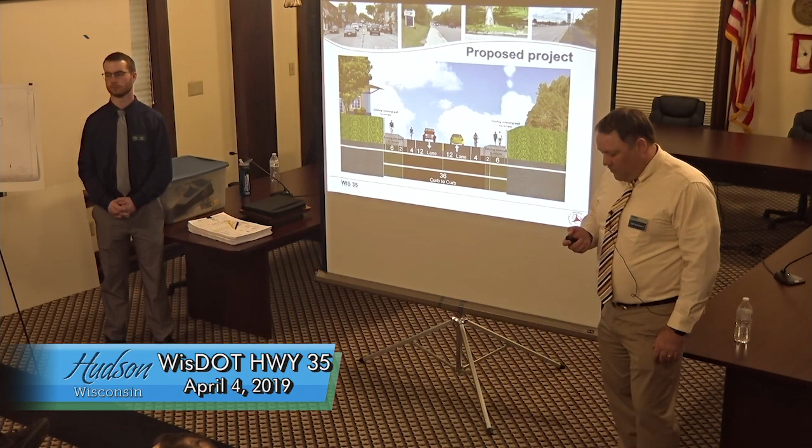If you put a handrail there, how do we propose clearing the snow on that narrower sidewalk? Because right now they come along. The sidewalk's not going to be narrower, we're not replacing that sidewalk. So they come along, drive up the road and scoop it out with a blade, then scoop it up behind. They'll have to do something different - they won't be able to pull it out.

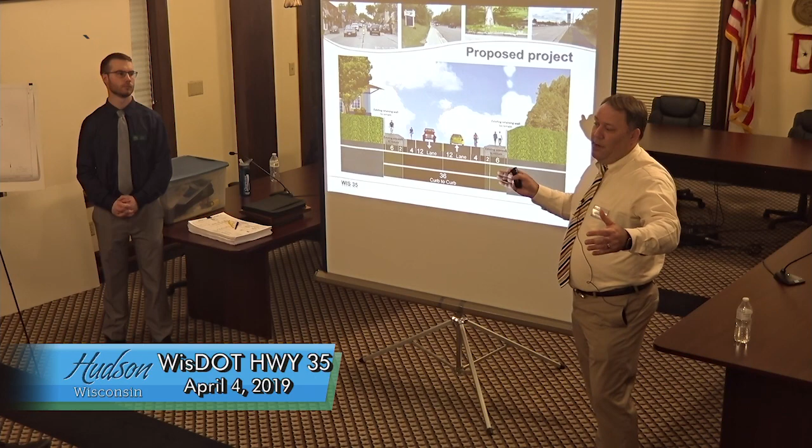Just a random thought in my head - we talked about that earlier with the city. They're going to have to change the way they snowplow for that roughly 75 to 100 feet on either side. It's on both sides of the road there, so yeah, that is a concern.

Is it possible to put that slope on the retaining wall side so you don't have to do the railing? I know that would move people closer to the traffic, but there is that bike lane there. That way you wouldn't have to put a railing in. It's doable, but it's not what we want to do. We don't want to remove that sidewalk in front of those walls - we don't really know what's underneath those walls or how they're held up.

From the existing retaining wall - your draft - we have a feeling those retaining walls may come down and tie underneath that sidewalk. Yeah, I mean, you're right. Instead of putting the slope right here, you could put a little slope up here. That is an option, you're right. I guess we didn't think about that, just due to the fact that we didn't want to touch that sidewalk in front of those retaining walls. A slope would be better than a rail. Yeah. We'll make a note of that, we'll look at that.

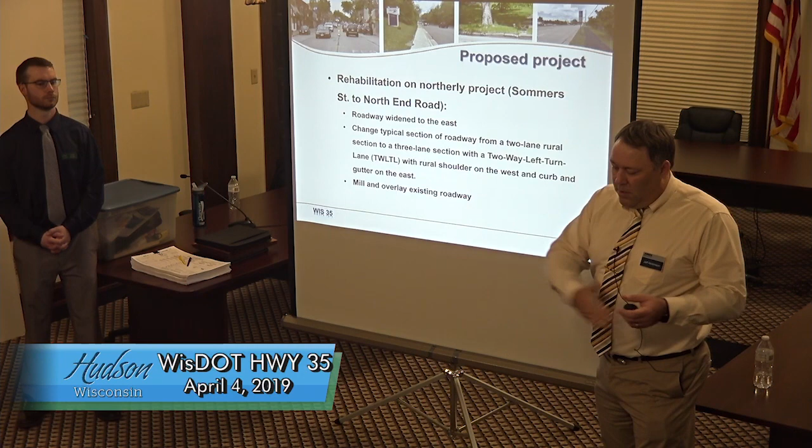So it's going to allow people that want to make a left turn, if they're heading southbound, to turn into any of those businesses. You'll be able to pull out of traffic and not back up traffic. That really should help eliminate all those rear end crashes. So that is the safety improvement project that's happening up there, making that a 3-lane with a twiddle.

And that new side, the right side, east side, will have curb and gutter on it. The left side, or the west, will look just like it does today, it'll just be a gravel shoulder. And then that segment, that 800 and some feet, will be milled. We'll mill up the asphalt and overlay it, pave it with new asphalt. We'll pave it at the same time we pave that widening, so it'll all look the same, and the striping and everything will work out.

So that project is getting a mill and overlay, and then widening, which would be a new pavement structure on the east side.

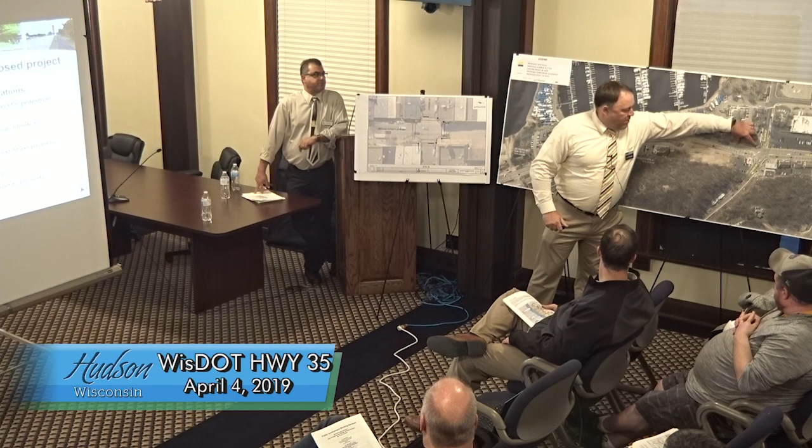Bike and pedestrian accommodation: obviously there's existing sidewalk through most of the project. There's a segment up the north end of the project, north and east side, where there is no sidewalk. But in general, there's sidewalk the majority of the corridor, and that sidewalk is going to remain where it's at today, with the exception of a piece at Coulee. Coming into Coulee, it tapers in, and it's right behind the curb and gutter, right up tight to the road. We're going to bend it out and keep it away from traffic, make a boulevard there.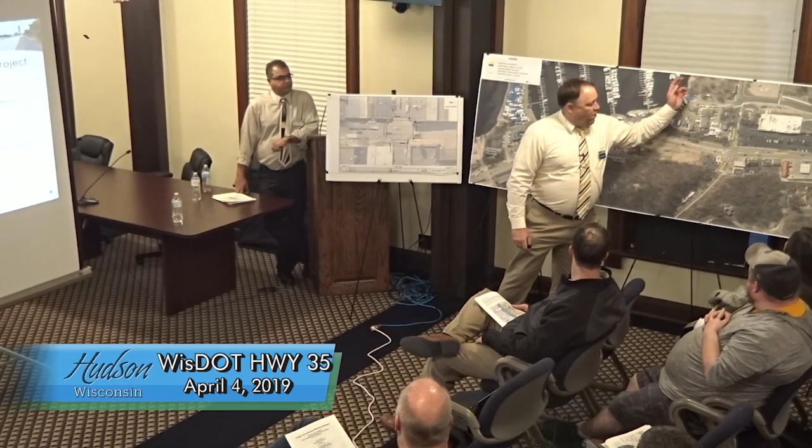And the bike trail comes from down under the interstate, comes up past the marina, and then turns on Buckeye. From there, we're going to have on-street bike all the way up to River, and then turn and come out on River. That's where we're narrowing up to 36 foot from River to the north, and that accommodates bikes. We are also looking at an option of widening this to an 8-foot asphalt path instead of a 5-foot concrete.

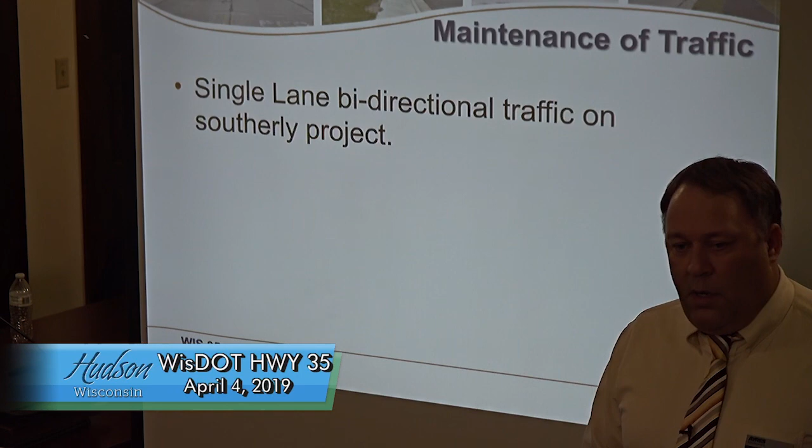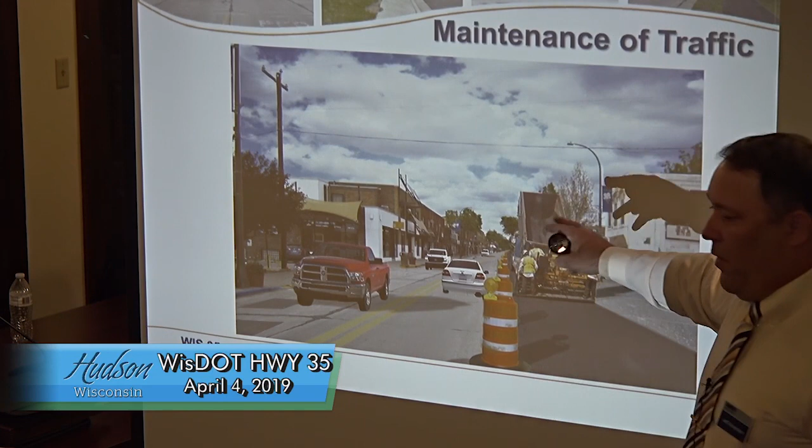Maintenance of traffic for the southern project will be bi-directional. That's the one getting mill and overlay, and there's also some utility work on the south end. For that project we'll be flopping traffic back and forth, maintaining one direction each way while paving one side. It will look like this. During that time parking won't be available since we'll be driving in the parking lane. The good thing is it's a pretty short time frame, it doesn't take long to mill. The utility work down here will take longer because it's a big open trench for the sanitary line.

But since there are 4 lanes, we can still maintain 1 lane in each direction down here, and through downtown we'll still have 1 lane each direction. That construction is a shorter time period and doesn't take as long.

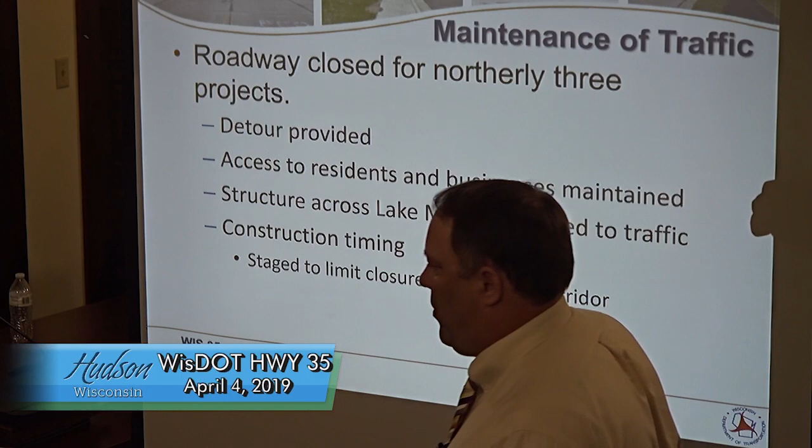The project, the north 2 project, technically the north 3, the road is closed. There is a signed detour route. It's over using Vine Street, which is W. The official signed detour route is W to A to E.

We have to sign a detour route. This is a state highway, so we have to sign a detour route on a county trunk highway or above level. We can't sign it on town roads. I know there's a lot of parallel routes here that locals will probably use, but that is going to be the official detour route. We want to get as much through traffic out of here.

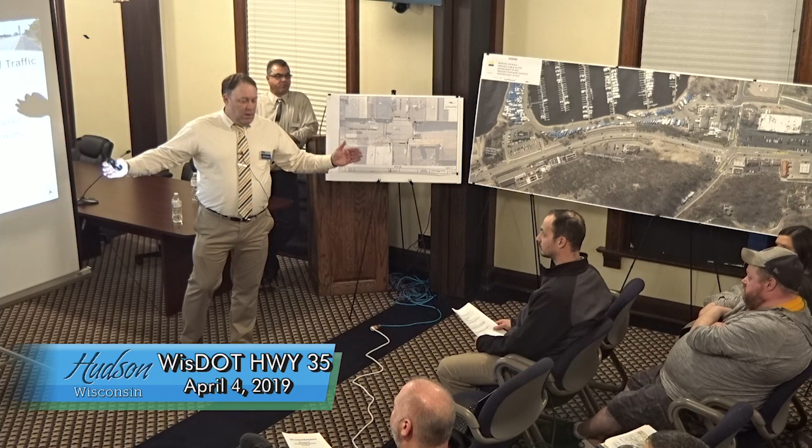Now, I want you guys to remember there's utility work going in here, sanitary and water, that's probably, some of it's 20 foot deep, okay? So 20 foot deep, you've got a pretty big wide trench. It's probably half the road that's going to be disturbed. We have to make access or provide access to businesses and residents, but we want to get the through traffic out.

Okay, so I want to preface this by saying this is under consideration here. We know we have to close the bridge to do the polymer overlay, okay? We don't want, like I said, all the through traffic going through here.

With this deep open cut trenches, it's a safety issue, we can't do it. We are going to look at doing the first 2 blocks south of the bridge and the 1 block north of the bridge. Doing that first right away.

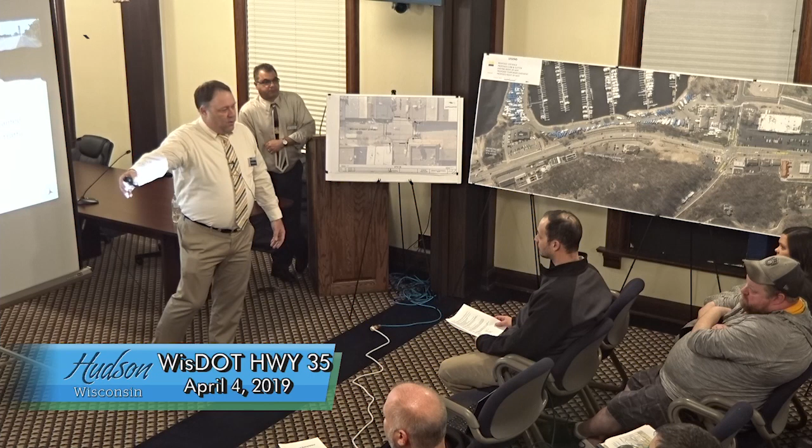So I want to make sure I preface this. This is something we just, at the first meeting, we told everybody that it was going to be closed, okay? And we know that's a big inconvenience for a lot of people. So we are looking at seeing if there's a way, the department is going to discuss it internally and see if there's a way we can do the construction staging so that we can close it for a short period and then open it up.

Shorter than the whole construction season. Short period, you're talking 3-4 blocks with the utilities. We could open it up to gravel. People might have to drive on gravel, which would help save because it is concrete. But you're still probably talking close to 4 weeks, a month.

But I want you guys to realize this whole construction period is going to take most of a summer. There's a lot of utility work going on here, which takes time, and it's deep. Yes, question? You're worried about how deep the utility work is going to be. What about piling sheets?

Piling sheathings, you don't have to, you can pile those down along the edge of your cut line, and you can go as deep as you want. Yeah, you could, yeah. You'd probably triple the cost of this project if you did that on the length of this project.

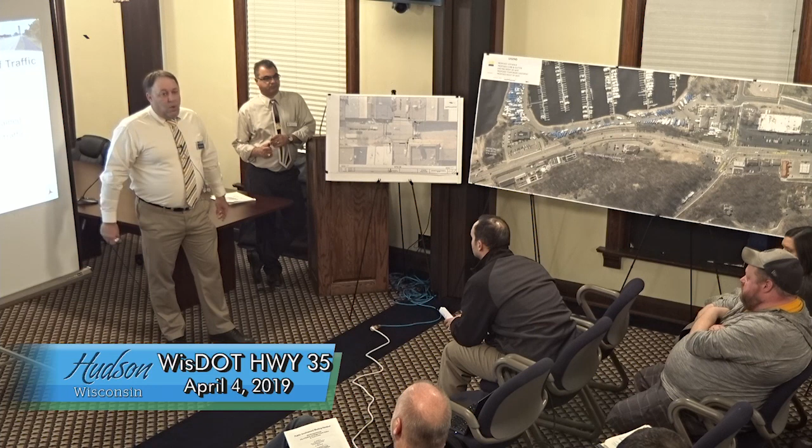So, like I said, the department is going to be looking at if it's feasible to do the work that has to be done on either side of the bridge, do that right away, as fast as we can, and then open the bridge back up to local traffic. Again, it's not going to be through traffic, it's basically to local people within the corridor.

Because we're not talking about an inconvenience here, by any means. No, this is not an inconvenience. We understand that the work has to get done, but there are ways to do this that don't require shutting the whole thing down.

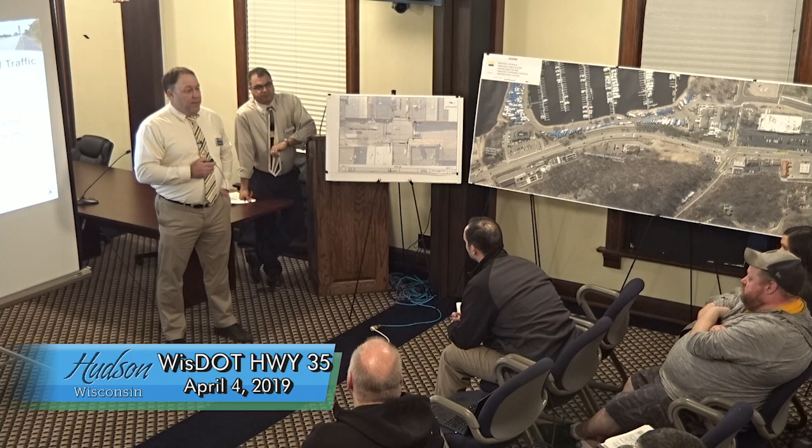I was a land surveyor, I'm not just coming off the street like no one has ever been in this business before. I worked for almost 30 years as a land surveyor and did a lot of projects like this. We use sheet piling on bridges a lot for keeping up side slopes. You have to remember, what you have exposed, there's another third in the ground. So if you've got a 20-foot hole, you're probably looking at 30-foot sheeting for 2 miles on both sides. You're probably tripling the cost of the project.

But I mean, it's something we can look at, obviously. Well, it seems to me you don't have to do it the whole length of the project. The majority of the sanitary is deep. I understand that, but what we're talking about is the priority of keeping that bridge open.

So if you did it 2 blocks on the south side and 1 block on the north side—I apologize, I thought you were talking about the whole project length—then people can use the side streets to get through.

I'm sure the village is going to be happy to accommodate all of the business people on that road so we can have traffic between the 2 cities. What we're talking about here is the expense of the project to the state. Well, you're not talking about the cost of the project to the businesses if that bridge is closed. I'd rather see it come out of the state's pocket than our businesses' pockets. And there are cost shares here, so it is coming back to the village, or the town, excuse me, the village and the city as well on certain things. It's not, it's everybody, it's all of our money.

Got a question in the back? At your last meeting you said you don't want to stop visitors from visiting your downtown area. That was the earlier meeting, the Hudson section, the 2 hours. Okay, yeah, but you said you didn't want to stop that, it's bi-directional traffic down there, yeah.

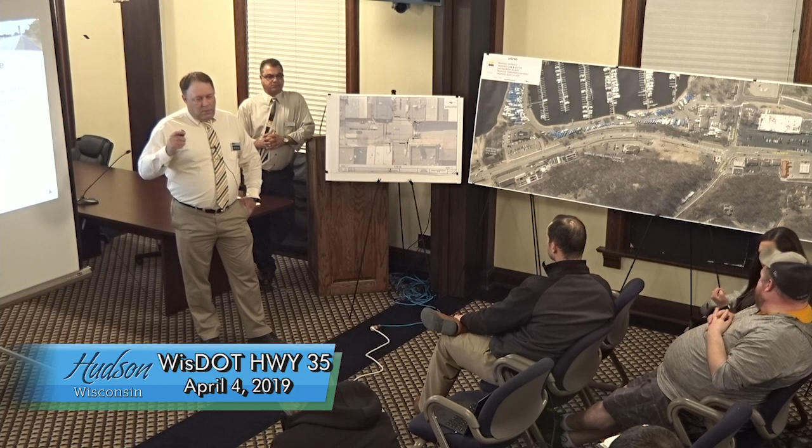I did forget to talk about the real estate. At some of these curb ramps, we're going to have to get temporary easements to blend the curb ramps in around the corners at the intersections. So there will be some temporary easements required, primarily for these curb ramps, and also at a few driveways we're trying to improve. There may be some easements required at some driveways to help blend those in.

We're planning on another PIM at the end of this year, beginning of next, and that one will have what we probably consider close to final plans. We've got about a 60% plan level right now, but a lot of these details will get worked out in the final stages. Our final plans are due to the DOT in May, a little over a year from now. Then it'll be bid out to a contractor late next year for 2021 construction. So it's two years from now.

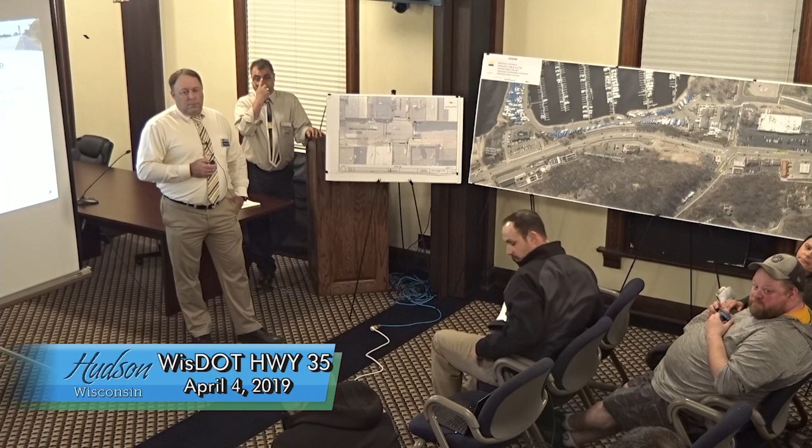We have had a number of business owners here speak to the fact that we in North Hudson are looking at the possible death of our businesses. I don't know if you've ever run a business or tried to raise a family on the income from a business. I went to work this morning at 9 o'clock. I came here at 7 o'clock from that same business. My husband and I do that day in and day out. And when you say, with a calm face, I understand, I don't think you do.

This construction season project can bury us, and you can say I understand, but when you say that, I don't think you do. It's not just the death of a business here and there, which is serious enough in itself, but it's our whole community of North Hudson that you're standing there saying I understand. Unless you've run your own business, sir, in an area affected by traffic in and out, I don't think you do, and I don't think the state does. I don't know that this is going to change your mind one way or the other. But—

There has to be a better way than to close off access to our community for a construction season. When you say a 4-month construction season, we watched that project on the interstate last from spring until well into late fall. That is a long construction season. It was longer than 4 months.

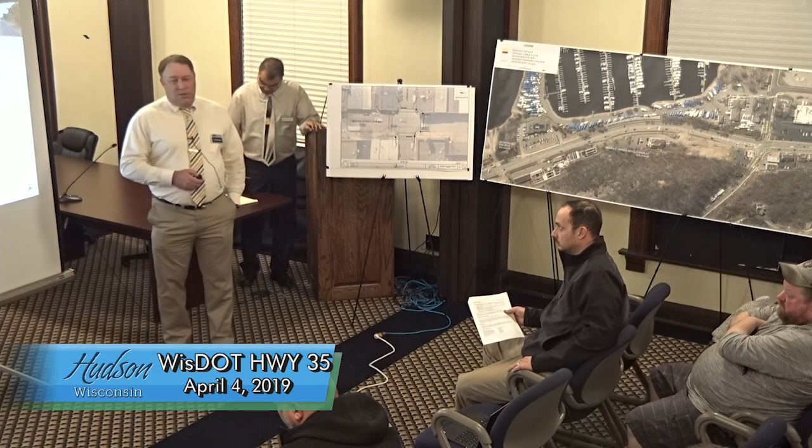Yeah, and you're right, with weather too, things can get extended. There's a lot of utility work here that takes a long time, so it could end up being a 5 or 6 month construction season. And we're supposed to do what? No, I'm just saying it's a big project. It's going to take a long time to build this.

That's why the department is going to go back and discuss this internally and see what can be done. I'm not speaking for Mohammed and Bill, but they understand that we need to look at this. So, any other questions?

I have a comment. I hear the issues with North Hudson, but it will also impact Hudson too, because people don't just come from the south to go to Hudson. This is an issue that needs serious consideration. If the bridge is closed, it's going to be hard for people to get from the north into Hudson. We cross over that way going north and south all the time.

Okay, point taken. And again, I want to say thank you. We do really appreciate these comments, because this is what we need to hear and want to hear from you guys. We're going to do everything we can to try to minimize what happens out here. Again, that's why the department is taking a step back and looking at this again, and that's just because of your guys' comments today. So, thank you.